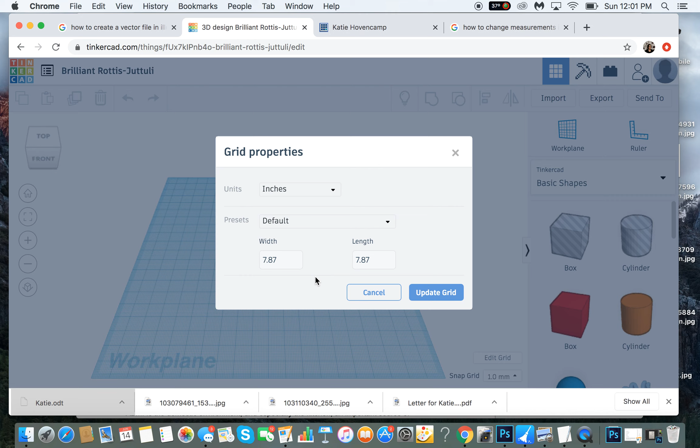One of the first things you want to make sure you do is change your measurements. If you look in the bottom right-hand corner, it will tell you that we're doing everything in millimeters. Just to make things a lot easier for ourselves, we're going to switch to inches. I'm going to click on Edit Grid, and you can see right here where it gives me the different measurements. So I want to change it to inches. Now I know that my work plane is 7.87 by 7.87 inches. I can go ahead, update my grid, and here we are - we have a grid that is measured in inches now.

So what we can do is take a look at our work plane and figure out some of the basics that are important for navigating your 3D model. If you look to the right hand part of your screen, I'm on the library where it says Tinkercad Basic Shapes. If you scroll down, it gives you some standard shapes you can use in your model. If you click on the library again, this gives you things that are a little bit more specific. If you decide you want to make something a little more complicated, you can click on one of these - this one, for example, is dinosaur parts.

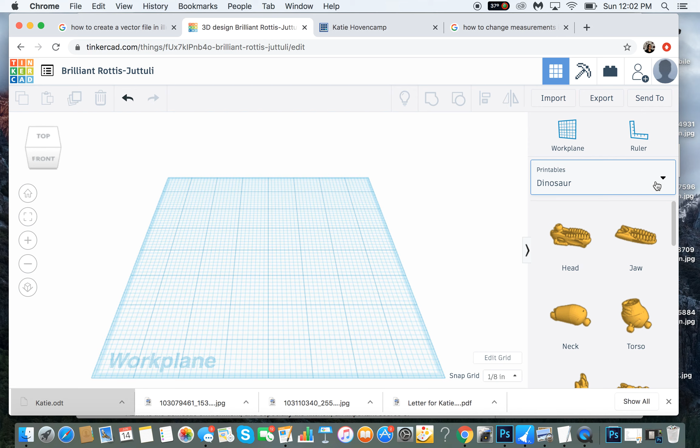So you could use some of these to create a 3D model of some sort. But today we're going to focus on the basic shapes and just play around and see what we have here. So in order to start off with a shape, I click on it and drag it over to my work plane.

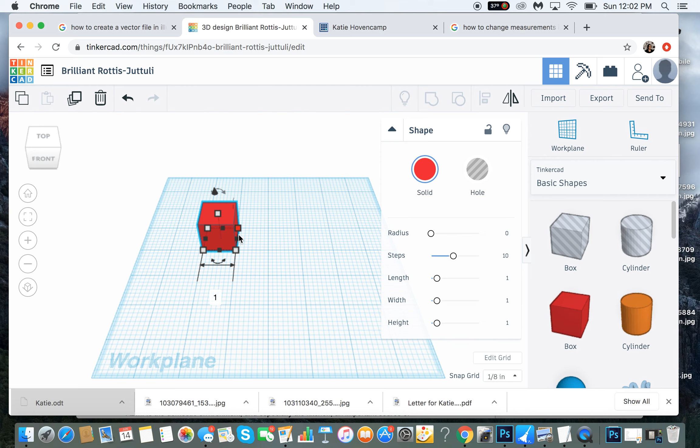This is telling me just certain sizes things are listed at, and right now what I can do is if I want to change it, I can click on one of these boxes and physically manipulate the shape. So I can make a really big, giant square if I like. And then say I want to make it taller.

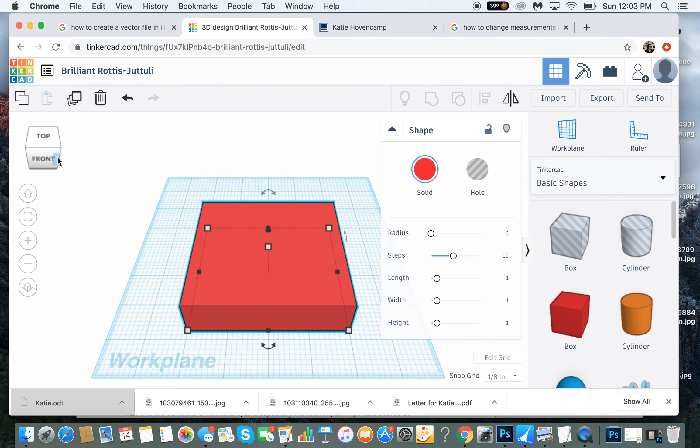What I need to do in order to do that is change the angle of my work plane, because right now it would be really hard to see if I'm going to make something taller. So I want to change the angle so I can see things a little bit better. If I go to the top left-hand corner, you see this little box where it says top and front - this is how I'm going to change the angles of my work plane. Wherever I have this little blue highlight, I can click on that and start moving it with my mouse, and that helps me change the angle of my work plane.

So I want to make this square a bit taller, right? So what I need to do is raise it up so it goes upward.

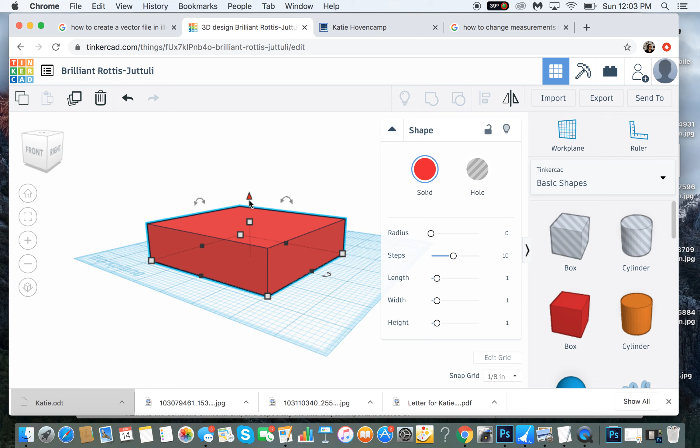Now, the easiest way for me to do that is to click on this little cone triangle shape right here. I click on that and I just start dragging. Oops, actually, this one brings it up and down. What I want to do is click on the one that is centered in the box, so this will help me make it taller.

And then, back to that cone shape, if I want to raise it up higher above the work plane because maybe I want to put other shapes underneath it, or maybe I just need to move it, that's what the little cone is for. So I can move that up and down.

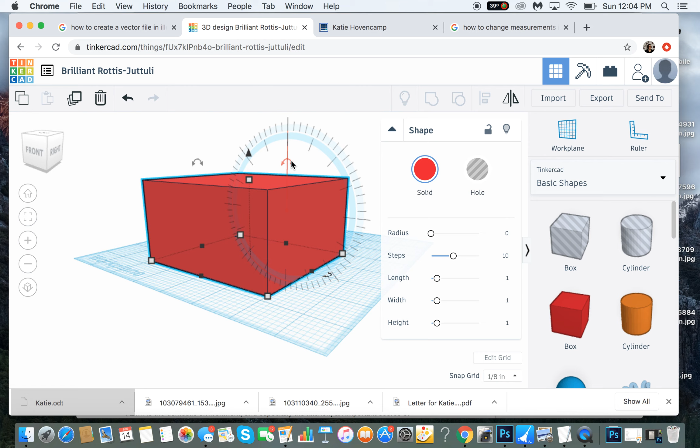Okay, so say I want to have this shape at an angle that's a little bit more off kilter, or more at a diagonal. If you look over here and see these little arrows that are kind of like half circles, that's the way I'm going to change the angle of my entire shape. So if I click on this one and start moving it, it's going to change the angle of my box here.

Okay, so that's how I can change the specific angle of that.

Okay, so now that I played around with just some basic moving and shaping, if I need to know my specific measurements, what I can do is hover my mouse over certain spots here like I am right now. So this is telling me that one of my sides is 3 1/4.

Whoops, come on, there we go. So I have one side to my left, 3 3/4, and then to my right, the other measurement is 4.331. That becomes really handy, especially if you're doing a project that has really specific measurements.

It'll tell you how big it is when it's going to 3D print.

Okay, so another thing that's important for 3D printing is saving material. So if we were to 3D print this specific box right now, what would be difficult about that is it would use a lot of the plastic filament material. So this would all be a solid mass. And what's tricky about that is it's going to eat up a lot of material and ultimately it costs more to make it that way.

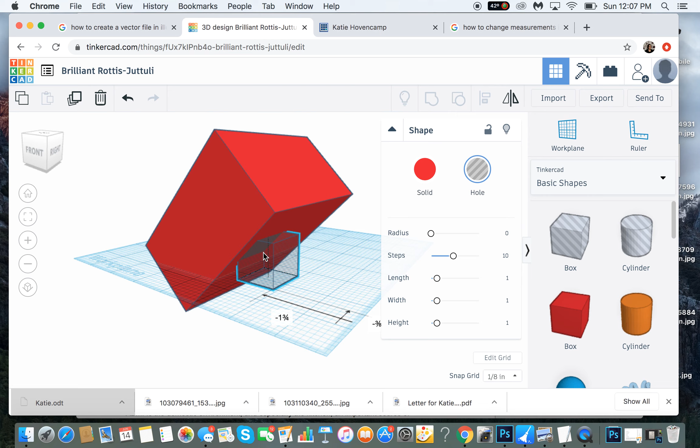So we're going to go ahead and drag another box in here. You'll notice that the box that I picked isn't a solid color like the big red one I did before, this is a hole box, right? So what I can do is, if I want to put a box shape in here, I can push that into my original shape, and hit Shift and select both of them together.

Now, this is really important because when I have them together and then I select what's called the group tool, which is what my mouse is over right now—you can either do Control G or select the group tool on your toolbar—what that's going to do is cut a little hole right in that box.

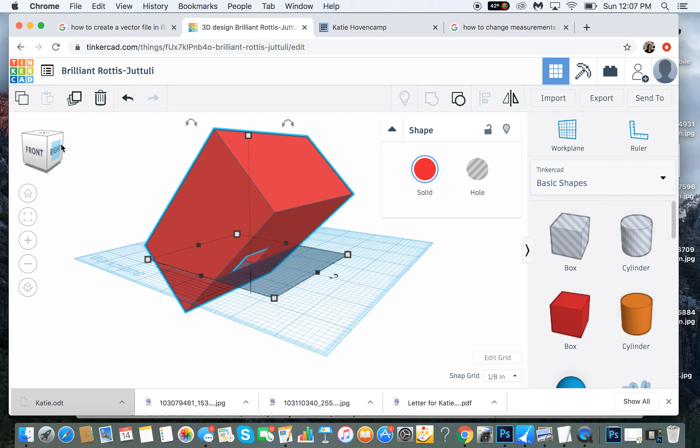So let's go ahead and change the angle of our work plane so we can see that a little better. So right now it's a small box, but I was able to cut a hole out in it. Now we can see that better, now that I deselected everything, but we have a hole in the box. Now, say we're not entirely thrilled with the size of that hole, we can change that.

It's a pretty easy fix. Right now I had the boxes grouped, which I did by selecting them and hitting Control G, putting those two shapes together. So if I want to change the shape of the box I made the hole with, I can do an ungroup to get the original shape back, and maybe carve more of a hole into my original red box shape. So I'm going to do that now.

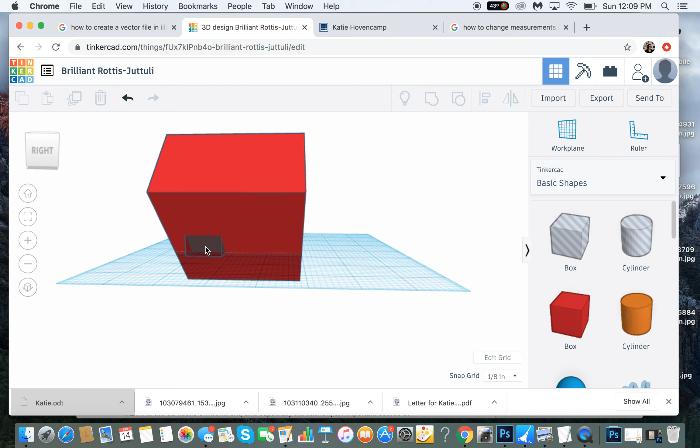I made sure everything's selected before I hit ungroup. To do an ungroup, you can either select it up here or hit Control Shift G. Now it brought my shapes back to two. If I deselect them, I could select one at a time. So I selected the box that was going to make the hole, and I want to make it bigger, so I'm going to manipulate that.

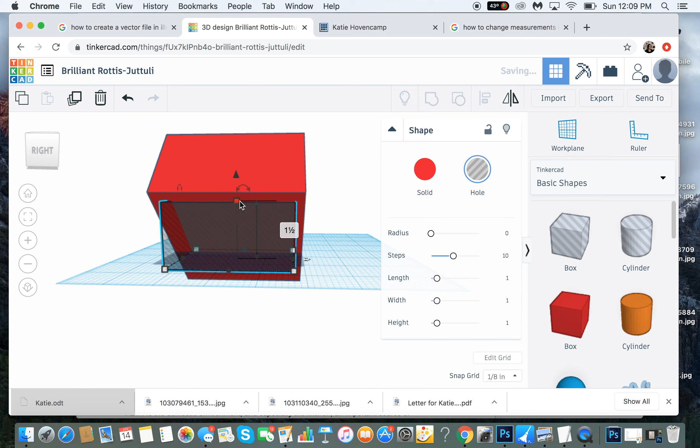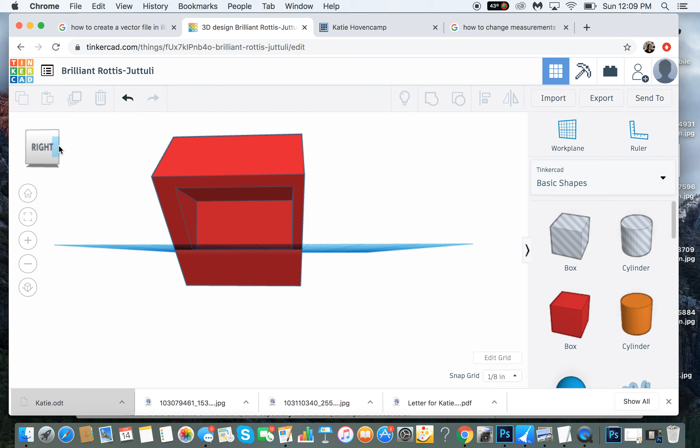I'm going to see if we can carve out a bigger shape. So let's select both just like we did before, and I'll hit my group tool. That will cut that hole in my box. Let's take a good look at that — that made a better size hole. Again, it helps a lot with hollowing out shapes so that way you're not using as much 3D print material.

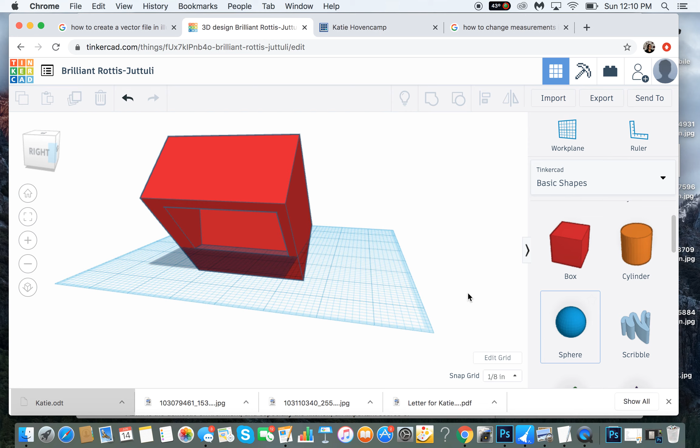Say I want to make this form a little bit more complicated. I don't have to stick to just boxes — I can pull out other shapes from my library. Say I want to use a sphere, I can throw that in there and merge it with my piece. I'm actually just going to take several of them.

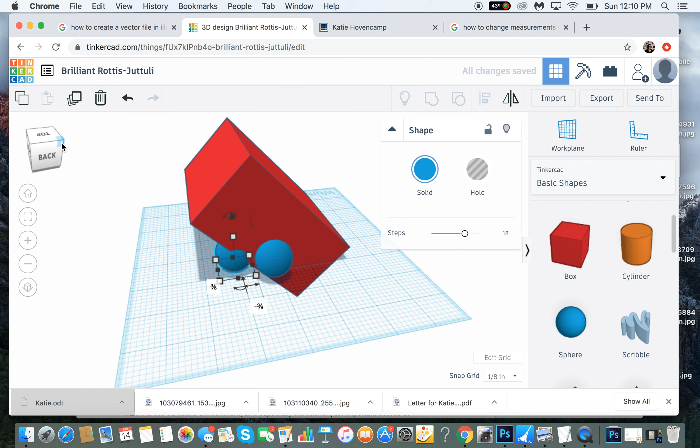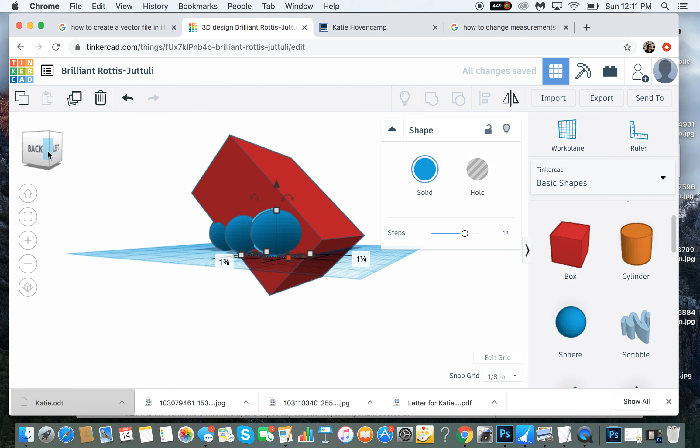Just kind of merge it in, see how that looks. It's important to keep changing the angles too, because you really want to see how it's sitting on your model. I keep using the sphere shape because I'm looking to make a fun texture, and I'm going to start varying some of my shapes here. Let's see how that looks. So now I have a little bit of a warty box here. Let me do one more.

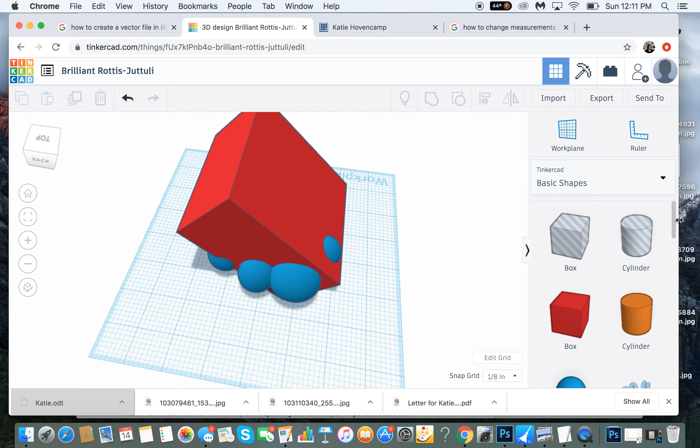Okay, so that's my shape. Again, you have a variety of them, so you can really play around with this and see what different things you get. Tinkercad's really good for doing all kinds of basic modeling. And as far as getting your files for a 3D printer, there's a couple different options we can do.

Another thing that's really great about Tinkercad is sometimes you might need another program in order to create your models — sometimes you have to collage them a little bit. So another program we'll go over is called Sculptris. What's nice about that program is it works really well if you're looking to do things with more organic shapes. It's kind of like a three-dimensional Photoshop in my opinion, and I think it works really well. So say you create a file in Sculptris and want to merge it with something more geometrical, which works really well for programs like Tinkercad.